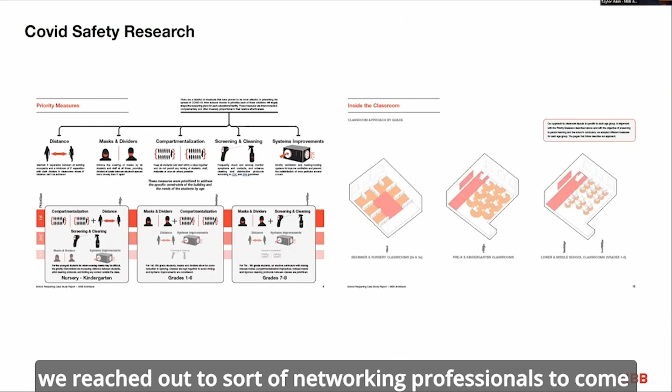We reached out to networking professionals to come up with good ideas for how to do this. I keep thinking that all of this expertise is now irrelevant and doesn't matter anymore, and that keeps not being the case. I know this has been going on for a long time, and everybody has found ways to adapt. I think what I'd like to talk about today is that nobody wants to repeat the last 2 years, but we should prepare for the reality that this is going to be an ongoing issue, and we need to find more durable, sustainable ways to adapt.

Everybody has reacted to this in different ways. That's dependent on what we've been told to do. It's dependent on the makeup of the communities and, frankly, their risk tolerance. And it has to do with the physical characteristics of the buildings themselves.

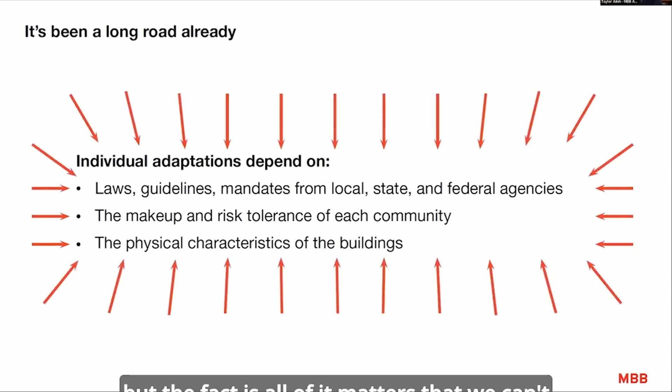You would think that the buildings is where we would focus our energy and attention, but the fact is all of it matters, that we can't look at any of these measures in isolation, like a table held up by 3 legs. This table has 15 legs, but they're not all equal. You take away 1 or 2 of the big ones, the thing's going down.

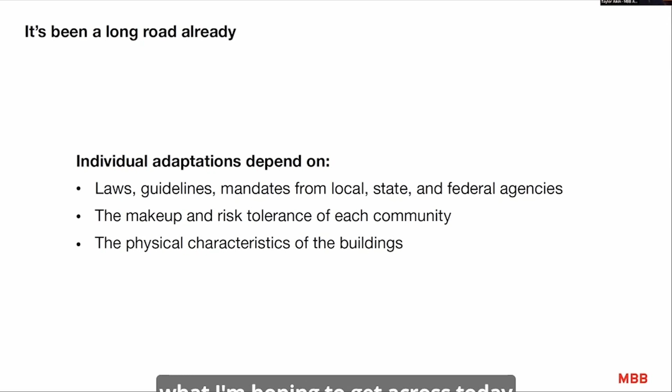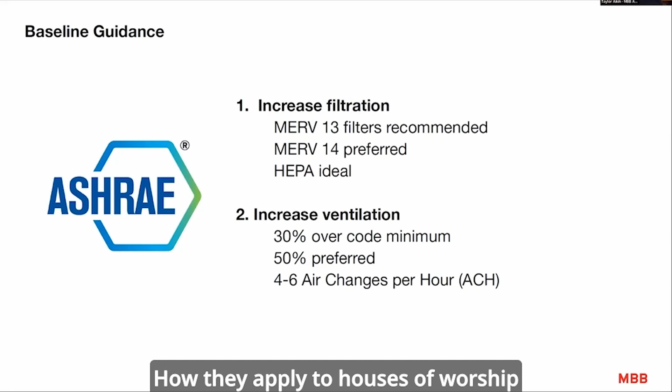So I think the goal here, what I'm hoping to get across today, is to deliver a more intuitive understanding of what the guidelines are, how they apply to houses of worship, because frankly, they're weird. A lot of the guidelines are simply not applicable. We've had to find some clever workarounds in the analyses that we've done. So that's the goal in 15 minutes. I think I can do it.

So we'll start with the easy stuff. The entity that delivers recommendations for what you should do with your building systems is ASHRAE, the American Society of Heating, Refrigerating, and Air Conditioning Engineers. It boils down to 2 things: increasing filtration and increasing ventilation, so that you filter the air as it goes and you get more outside air into it. We're going to come back to each of these in a bit more specificity.

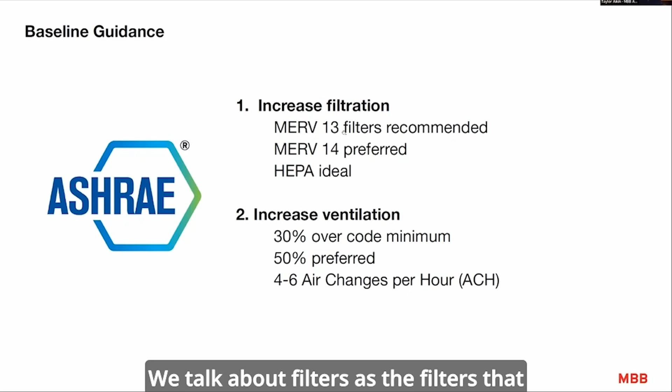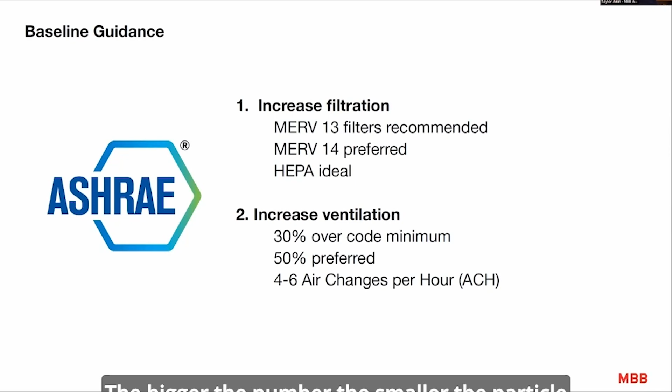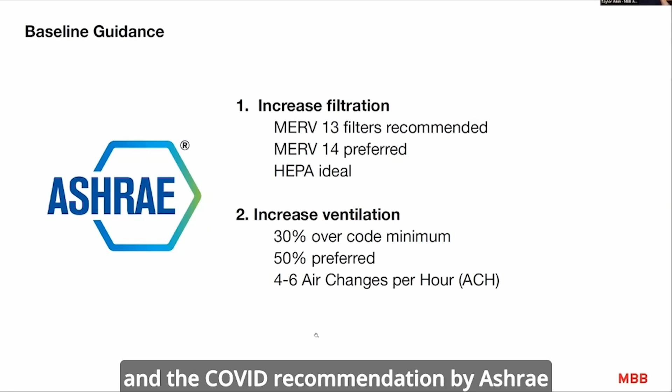When we talk about ventilation, one of the metrics they use is called air changes per hour, ACH. The COVID recommendation by ASHRAE is 4 to 6 air changes per hour, meaning any bit of air in your room is cycled through the system every 10 to 15 minutes. So those guidelines make great sense if you're in a space scaled for classrooms, conference rooms, whatever, if you've got contemporary mechanical systems that comply with current code for outdoor air supply. But what if you don't?

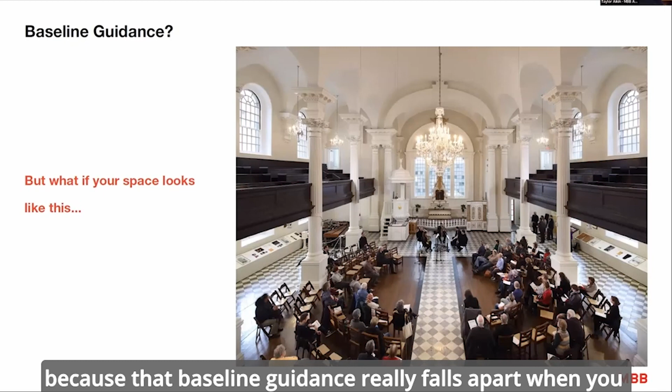What if your space is a very different kind of space? That's what we're going to look at, because that baseline guidance really falls apart when you start looking at historic buildings, religious buildings, and large buildings that either have mechanical systems that are old, or, as Jason mentioned, non-existent, or weird in some way, which is often the case.

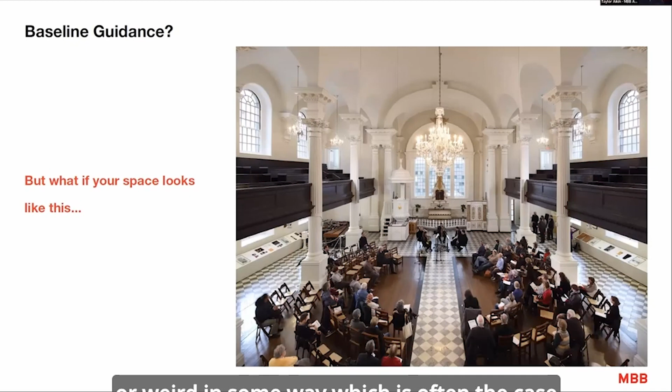So the recommendations then, instead of just looking at the filter you should put in your air handler that may or may not exist, we looked at it for 3 categories: people and what people are doing, the systems themselves, and then workarounds for when the guidelines don't apply.

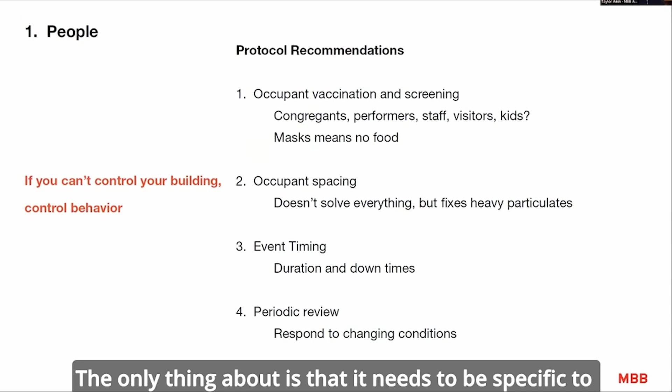So the people part is probably the most familiar to everybody. I don't know that I've got much new to say on this, except that when we're talking about vaccinations and screening, testing requirements, agreements to what you will claim to have done or not done when you come into the building, the only thing I'd add is that it needs to be specific to people who are doing different things. For example, if you have a congregant sitting in a chair with a mask on, there's going to be one set of requirements.

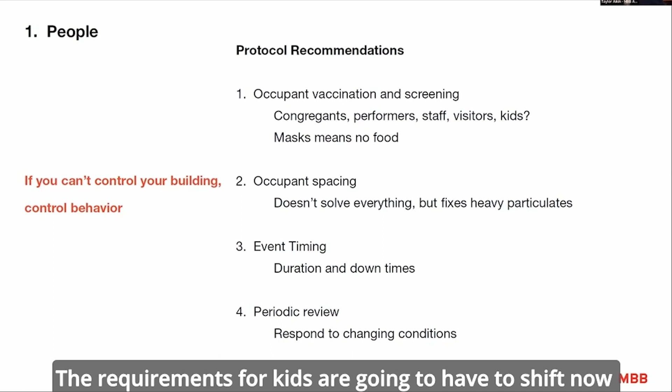If you have a choir member singing at the top of their voice without a mask facing those congregants, there are going to have to be stricter requirements, specifically for more regular testing. The requirements for kids are going to have to shift now that they're eligible for the vaccine, but not all of them have had it.

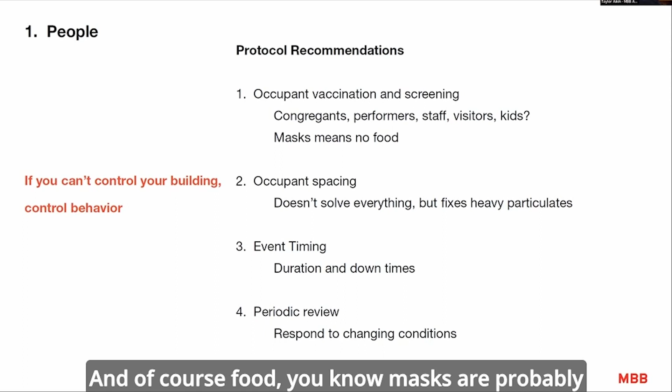And of course, food. Masks are probably the biggest table leg holding this thing up. So if you introduce food, the masks go away and it's problematic. Again, all this depends on the risk tolerance of your community.

On occupant spacing, we all know the 3-foot rule, the 6-foot rule. This is really just about sort of the... what's that? Sorry, Rick. Okay, if you have questions, you can interrupt me.

That's fine. I'm not going to watch the chat. So, hopefully we'll have time for questions at the end.

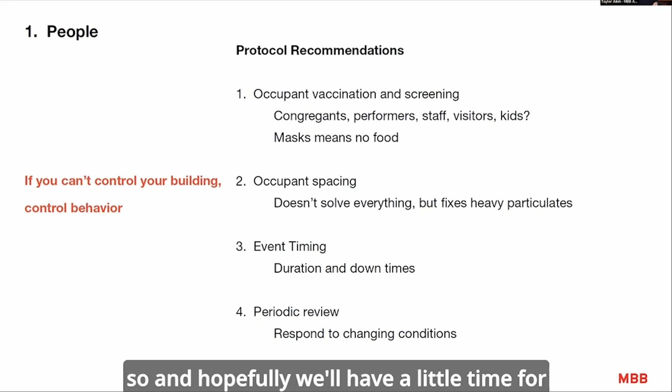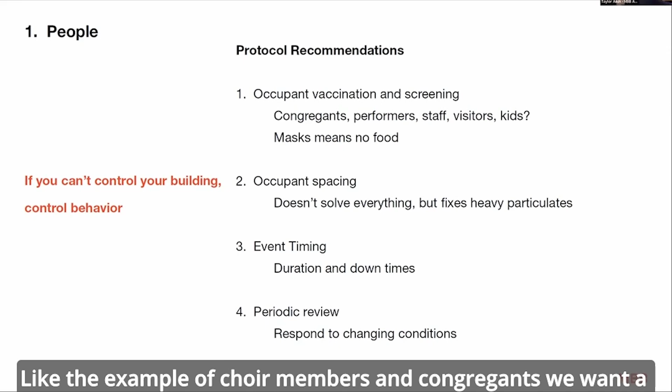So 6 feet is basically the distance it takes for a heavy particulate to drop to the floor. Like the example of choir members and congregants, we want a much bigger distance, 12 to 20 feet is recommended. And then event timing, we'll talk about in a little bit more detail. And then of course, reviewing these protocols as situations change.

So on the system recommendations, if you've got a forced air system with grills and air coming out of them, even if it's an old one, you may be able to tweak it. If you've got a modern system with controls, you can just dial up or dial down the amount of outdoor air that's supplied. That's easy, but you may also be able to move physical dampers to increase the outdoor air supply. We're going to talk about when that's a good idea to do.

It's good to keep in mind that you are going to run up against the capacity of your systems. Systems are designed for a certain level of efficiency, so that recirculated air requires less energy to heat or cool than outdoor air that's either extremely hot or extremely cold. So maintaining reasonable temperatures inside and reasonable relative humidity levels is a consideration.

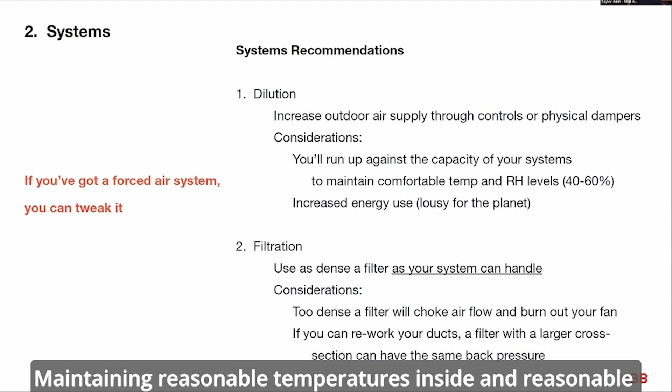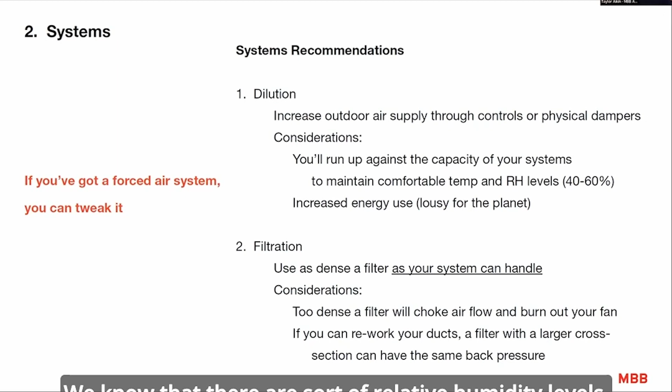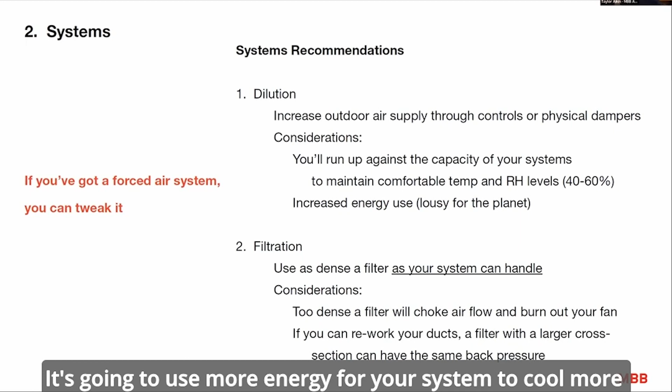I think you could stretch that envelope to a degree because the importance of dilution of indoor air with outside air is so important. We know that there are relative humidity levels at which virus particles are more or less comfortable, and so you want to target 50% relative humidity. Frankly, it's a drop in the bucket in terms of effectiveness compared to introducing outdoor air, and it's going to use more energy for your system to cool more hot outdoor air or heat more cold outdoor air. I'll come back to that again later.

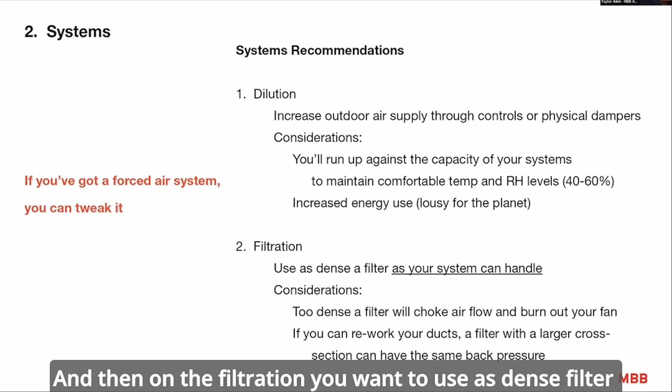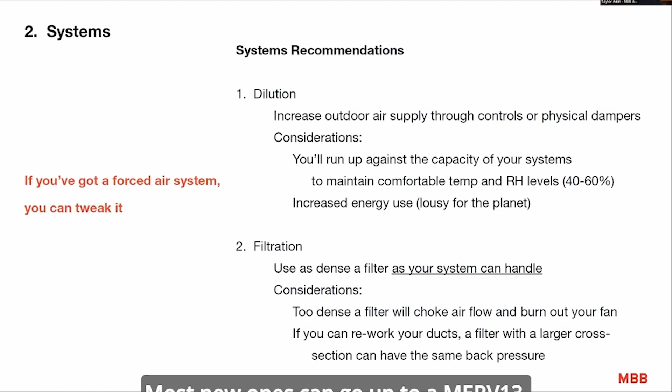On filtration, you want to use as dense a filter as the system can handle. It would be great if we could all just go get HEPA filters and pop them into our air handlers, but they're not designed for that density of filter, so it's going to choke your airflow. You're going to have less air moving through the system, and it's going to burn out your fan. There are manufacturer guidelines for any given piece of equipment that tell you how dense a filter you can put on. Most new ones can go up to a MERV 13. Old ones are designed for MERV 8, and anything else will kill it.

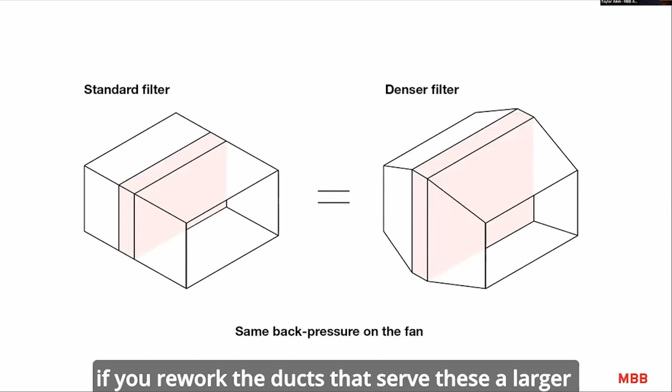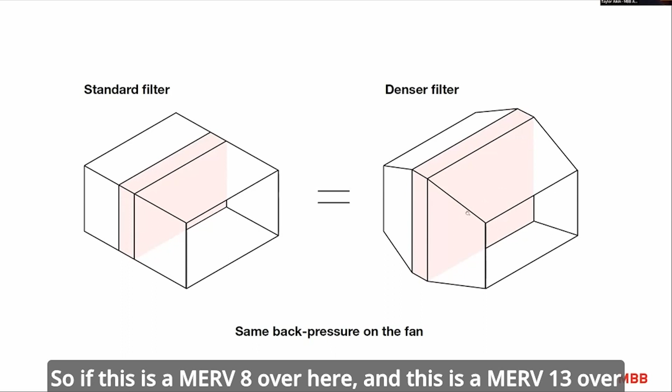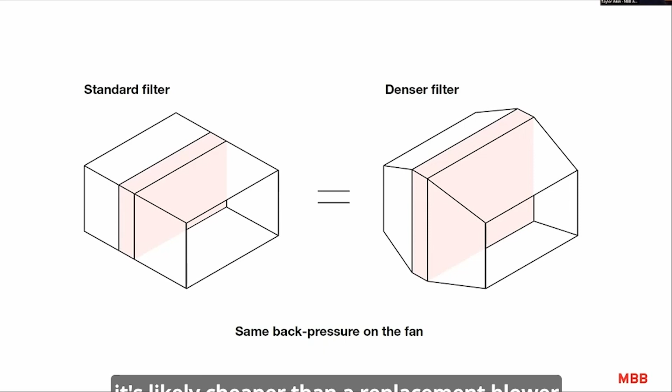One workaround we found is that if you rework the ducts, a larger cross-sectional area of a denser filter will have the same back pressure as a smaller cross-section. So if this is a MERV 8 over here and this is a MERV 13 over here, they actually have an equivalent back pressure. Now, a lot of what I'm talking about in terms of system adaptations don't cost anything. While this does cost something, it's likely cheaper than a replacement blower on an air handler, or the $250,000 it'll take to replace the entire system.

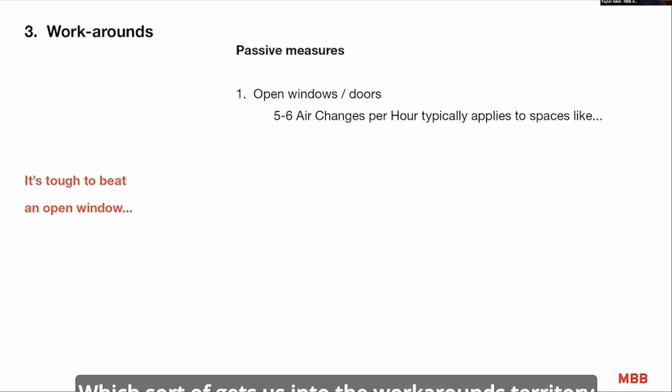Which sort of gets us into the workarounds territory. In all the analysis we did, starting with looking at schools and the different buildings and conditions we've looked at, it's tough to beat an open window.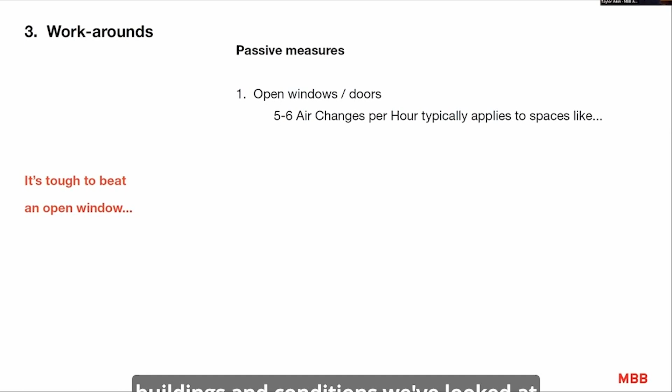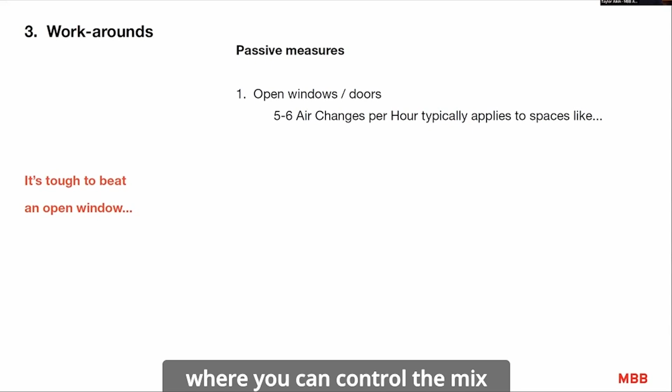Opening windows or doors, if you don't have a conventional mechanical system where you can control the mix of outdoor air, is hugely important.

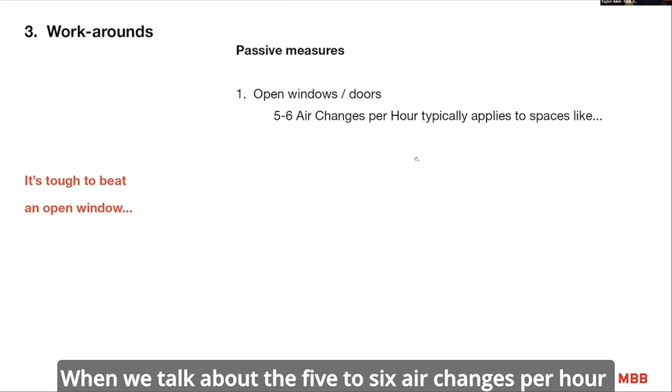When we talk about the 5 to 6 air changes per hour guidelines from ASHRAE, that makes perfect sense in a room like this conference room. You've got a contained volume of air, and you want that air recirculated with fresh air supplied to it. But in very different space types, 5 to 6 air changes per hour is kind of absurd because there's so much volume of air relative to the number of occupants. So you can actually calculate a fractional ACH equivalent. You don't need 5 to 6 air changes per hour in a space like this. You need something like 0.8 because there's just so much air in the space.

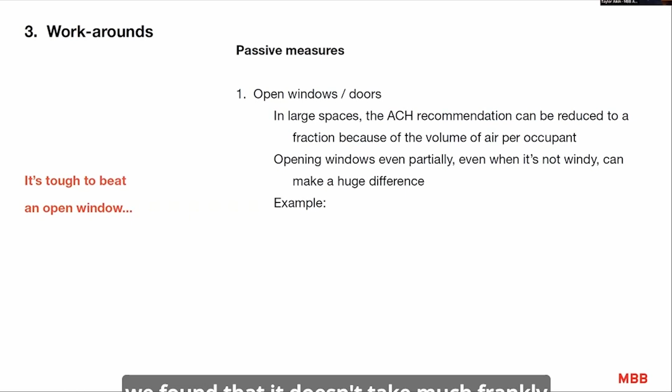When we did an analysis on a specific space, we found that it doesn't take much, frankly. We looked at how much outdoor air, given certain assumptions, we'd need to supply to get that 5 to 6 air changes per hour equivalent. We found that just one window opened, assuming a 1 mile per hour wind speed outside, would get us there—and most of the time it's more windy than that. There are 20 windows in the space, so you could open all of them 1/20th as much and it'll get you there. So be aware that because we're dealing with large volumes of space, it may not take as much as you think to get a huge improvement in ventilation.

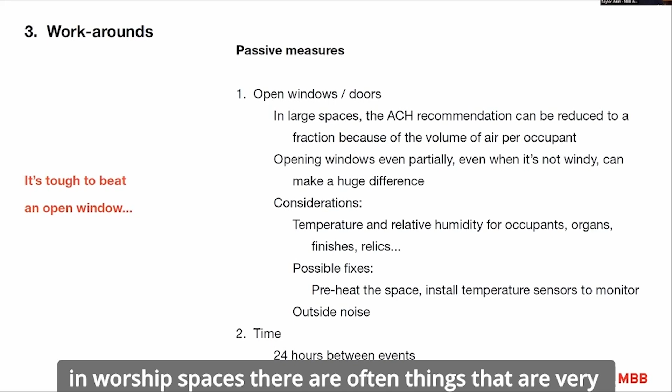There are considerations related to that. We talked about temperature and relative humidity before. In worship spaces, there are often things very sensitive to changes in extreme temperature and relative humidity. For example, organs are really finicky. Their finishes—very thin wood veneers or metal finishes—can be sensitive to that. And if you have, for example, Torah scrolls in your space, that can be very sensitive to extreme temperature and humidity.

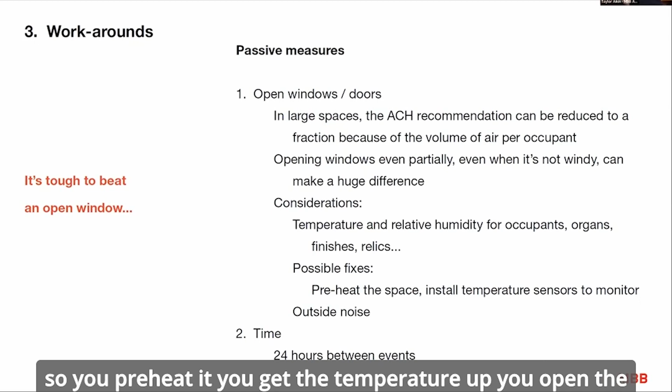So potential workarounds for that: before an event, you sort of prime the space. You preheat it, get the temperature up, open the windows, it gradually cools down, and at some point you hit a threshold where if it gets any colder things are going to start to be damaged, and you shut it down. That was sort of the solution we were looking at for that condition.

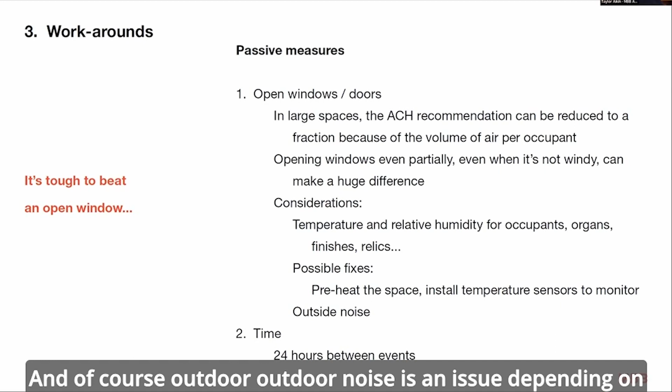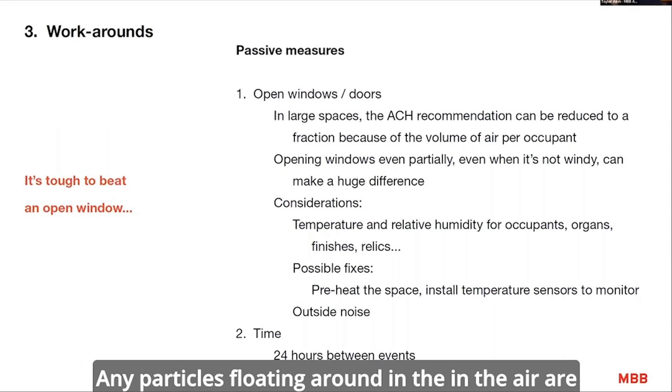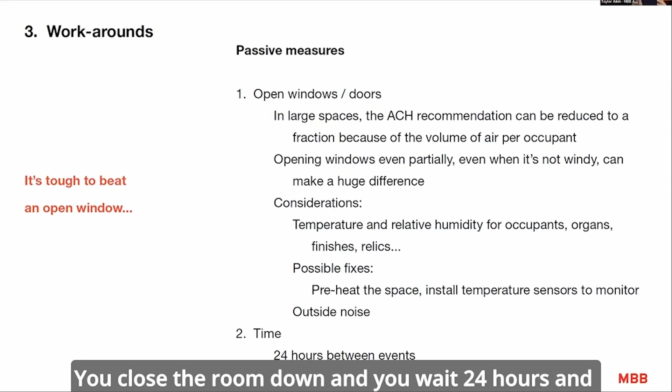Of course, outdoor noise is an issue depending on where you are and what's around you—that's just a consideration. Now, the goal of the 5 to 6 air changes per hour is to make sure any particles floating in the air are cycled through the system and filtered out or diluted with outdoor air. If you can't do that, or it's impractical, time solves it too. You close the room down and wait 24 hours, and effectively the same thing happens. If you can schedule 24 hours between events, it means you've eliminated the risk of exposure between one group being in the space at one time and another at another time.

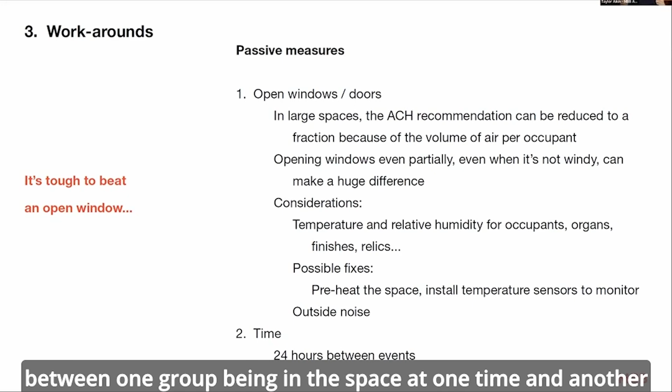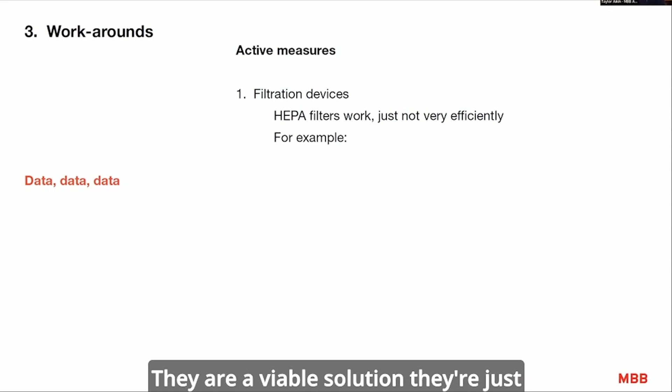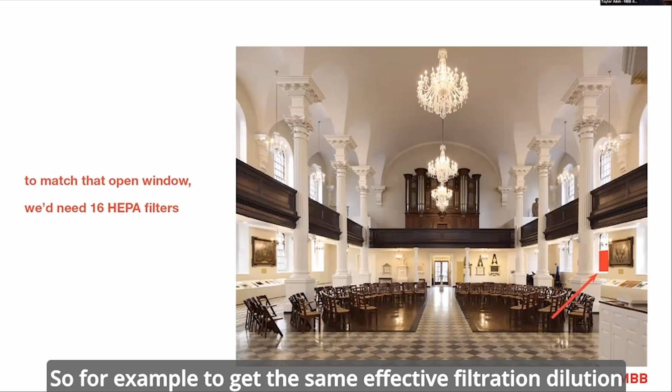So those are passive workarounds. When we talk about active workarounds, standalone filtration devices like standalone HEPA filters—there's one sitting right here—they work. They are a viable solution, they're just not terribly efficient. For example, to get the same effective filtration dilution impact we got from this one open window, we would need 16 recirculating HEPA filters in this space, which is going to produce noise. We're going to have power sources we'll have to get to each of those. So it's viable, but relatively inefficient.

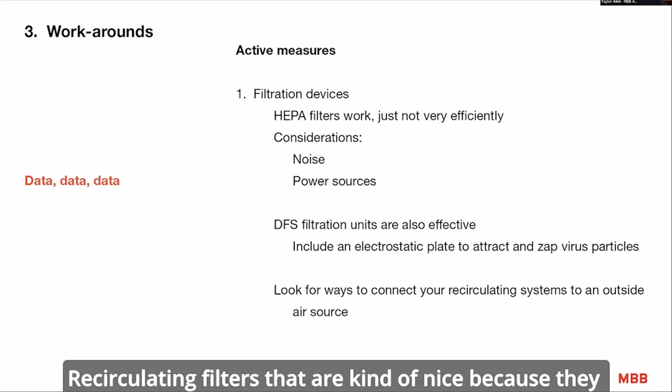Another version of that are called DFS, disinfecting filtration systems—standalone recirculating filters that are kind of nice because they have an electrostatic plate in them that zaps particles. So at least you're capturing a bunch of dead particles instead of a bunch of live virus particles.

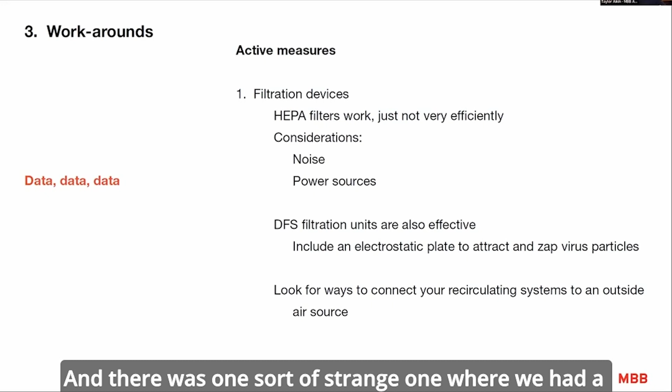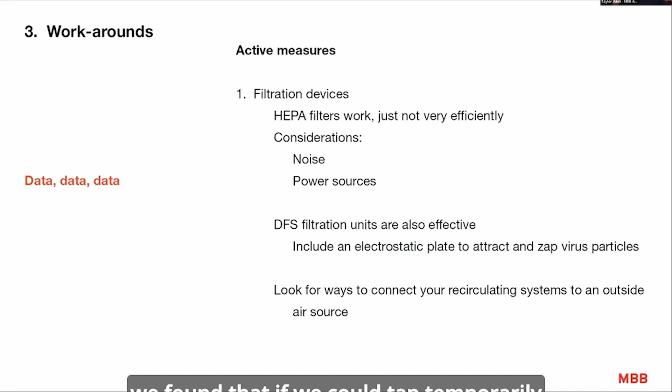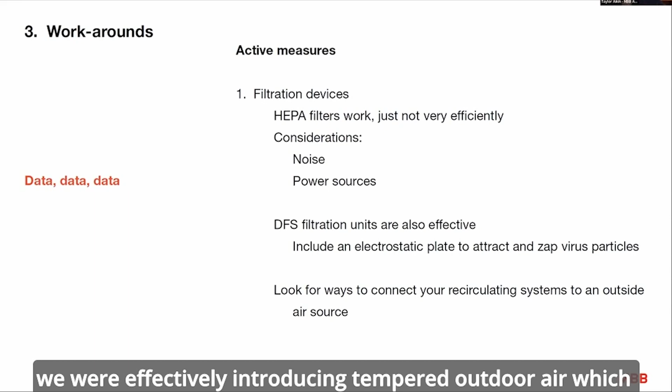There was one strange case where we had a building with recirculating units close to the perimeter. We found that if we could temporarily tap a duct to the recirculating intake of those units and just run it to a window, we were effectively introducing tempered outdoor air, which helped with both noise and the temperature drop in the space over time.

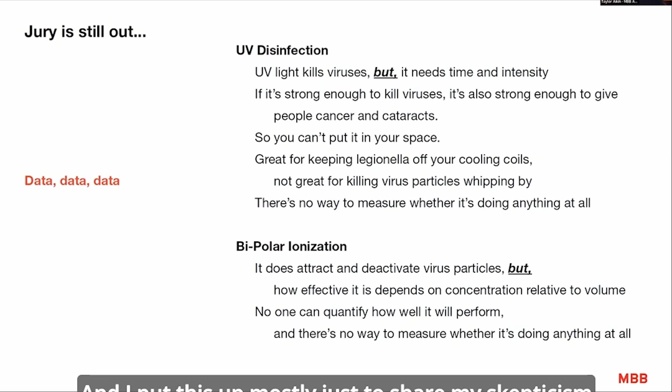The reason I put data over here is that there are other systems and pieces of equipment out there, some exotic, some simple. I put this up mostly to share my skepticism. Take just a couple of examples: UV disinfection. It is true that UV light kills viruses, but it needs time and intensity. Basically, if the UV light is strong enough to kill a virus, it's also strong enough to give people cancer and cataracts. So you can't just park it in your space.

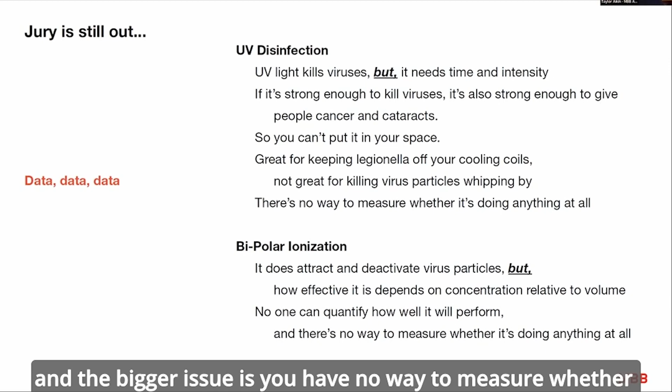If you put it in your air handling units, it is great for keeping Legionella bacteria off of your cooling coils, for example. But for the air that's whipping past them at a few hundred feet per minute, it is doing virtually nothing. And the bigger issue is you have no way to measure whether it's doing anything at all. You can spend $20,000 and put one of these systems into your HVAC equipment and have no idea whether it's working.

And the same kind of goes for bipolar ionization. It does work. You introduce charged particles into the air and it does attract virus particles and it does deactivate them. But nobody can quantify how well it works. It's all about how many charged particles you have and the density within the volume of space. So without any measurable information, we've not recommended this.

I've talked institutions out of both on multiple occasions, because it's kind of tough to beat an open window.

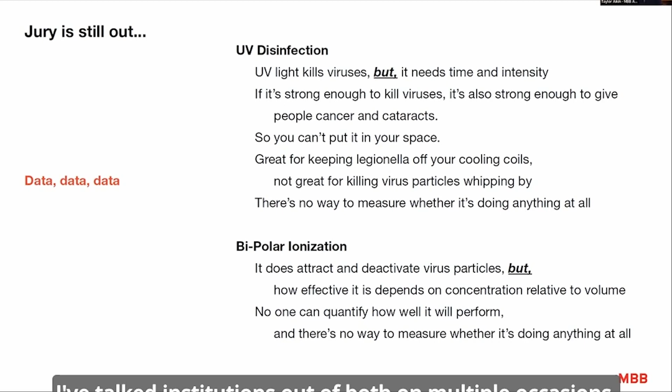Yeah, so I hope there was something new in here. I hope this wasn't a total repeat of everything you already knew and have been dealing with the last couple of weeks. But those are kind of the workarounds.

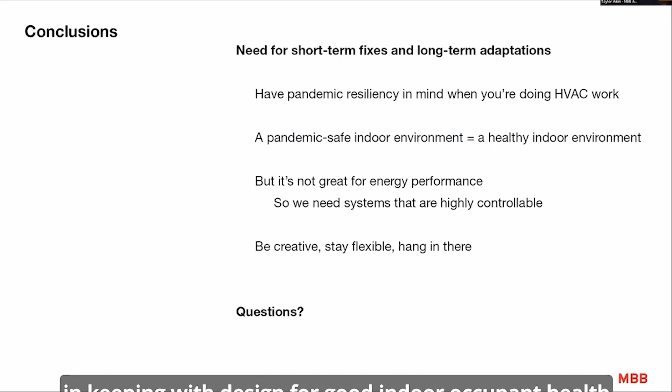When we think about the long-term impacts of this and how we adapt over the longer term, I think when you do work to your HVAC system, having pandemic resiliency in mind is something we should all do from now on. That's generally in keeping with design for good indoor occupant health. A pandemic-safe environment is a healthy environment by and large, but the kinds of things I've talked about are generally lousy for energy performance, like keeping your windows open and introducing more outdoor air.

So because energy performance is such a critical thing for buildings, as Meta is about to explain to us, what we really need are systems that are highly controllable, where you can dial up the outdoor air and dial down the outdoor air, so that our systems are as adaptable as the people in them.

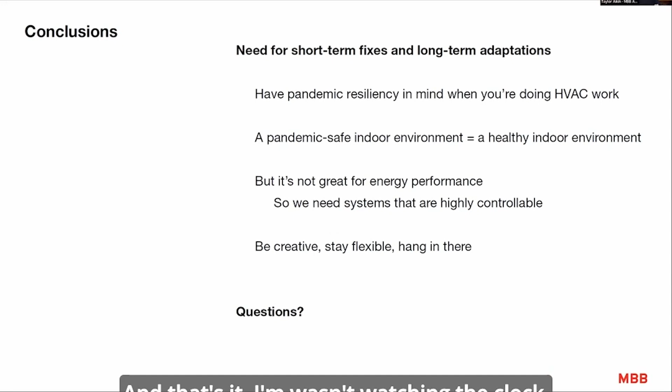And that's it. I wasn't watching the clock, so Kate, tell me if we've got a couple minutes. I don't know if there are any questions, but that's all I have.

Yeah, there's time for a couple questions if there are any. If there are any. Otherwise, I'll figure you've all got it figured out. All right, move on.

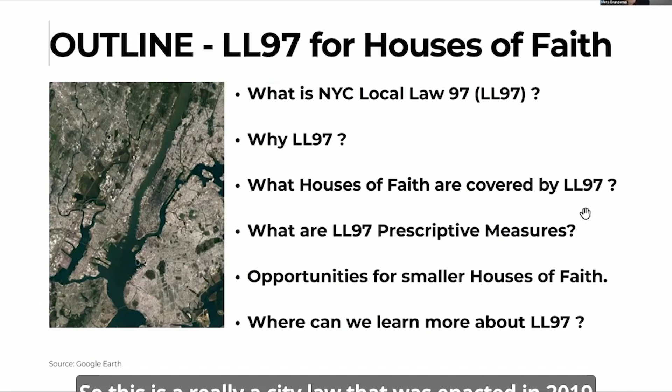Finally, in my last slide, I'll list a few resources where you can learn more about this topic. So this is really a city law that was enacted in 2019. It is the centerpiece of the New York City Landmark Climate Mobilization Act, also known as the New York City Green New Deal. And what it will do is place strict limits on greenhouse gas emissions from all buildings larger than 25,000 square feet.

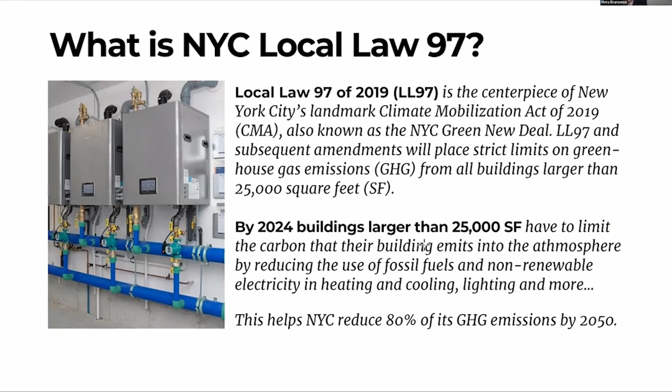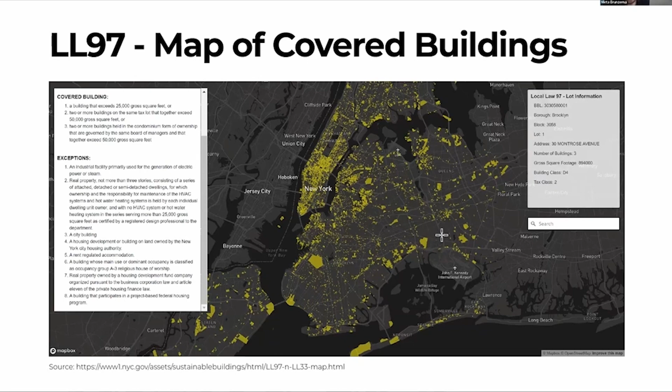Local Law 97 is only one of several laws enacted as part of the larger package in 2019. There's also Local Law 92 and 94 for green roofs and solar PV, Local Law 95 about building labeling—you may have seen the letter grades on buildings required in November, A, B, C, D, and F, showing how successful the building is in meeting energy efficiency—and a new law, Local Law 98, about offering wind energy as a potential energy source.

So what are the Local Law 97 goals? Obviously, it's to reduce operational greenhouse gas emissions in mid-size and large-size existing buildings, for example with heating, cooling, lighting, hot water, etc., and to meet New York City's global and local climate plan commitments. I will detail what those are in the next slide.

A side effect from this, which I'm sure is not unintentional, is to expand the energy retrofit market by approximately $20 billion from now until 2030. This will create approximately 141,000 design, engineering, and construction jobs. And of course, the net result will be that the city will have more valuable buildings and bring energy savings to building owners and tenants.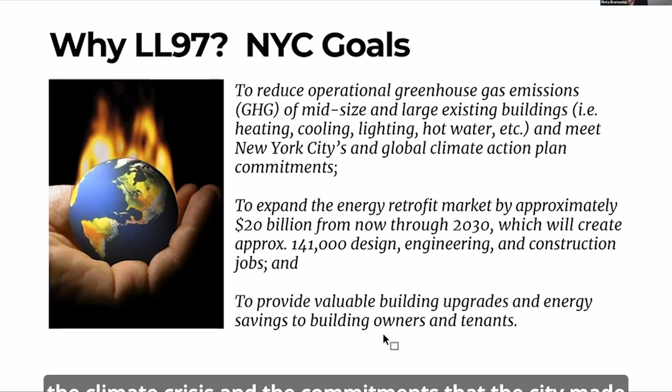But at the core of it all is really the climate crisis and the commitments that the city made. Already in 2014, Bill de Blasio committed to reducing the city's greenhouse gas emissions by 80%, and that is what 80 by 50 means—joining many other nations around the world in similar commitments.

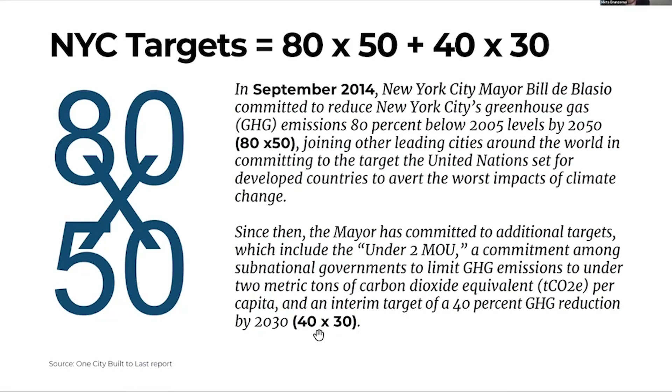After that, the mayor also committed to additional targets, called 40 by 30, which is an interim target of a 40% greenhouse gas reduction by 2030. So we have a lot of goals here that are part of the reasoning why this law is in fact being enacted.

The city is not alone. The city is working with a state that has its own climate action laws, and you can see there's a real deliberate timeline going from 2020 to 2050. The ultimate goal is citywide carbon neutrality.

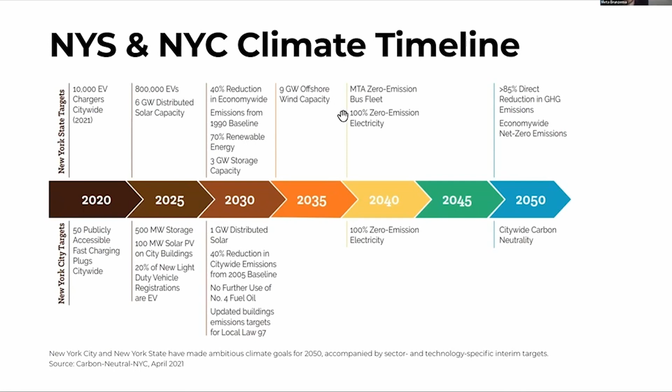So let's talk about Local Law 97 and houses of faith. You may have heard about Local Law 97 imposing carbon caps, like limits for carbon emission, in larger commercial and residential buildings. It turns out houses of faith are under Local Law 97, but they have an alternate path of compliance, to make it easier on houses of faith to meet the climate goals.

Houses of faith are not alone in having this particular special path. Certain affordable housing developments and NYCHA developments are also exempted and have special regulations. So what do houses of faith have to do?

There are prescriptive measures, which I will show you in a few slides, that are required of houses of faith to implement by 2024. These include the installation of insulation, sensors or controls for HVAC or heating and cooling equipment, as well as other energy efficiency measures.

Houses of faith smaller than 25,000 square feet do not have to comply with Local Law 97. But I know many houses of faith on this call are actually smaller congregations. The city is still very interested in having smaller buildings work toward climate neutrality, and I will discuss that in a few minutes. The city actually offers technical and financial help to buildings of all sizes.

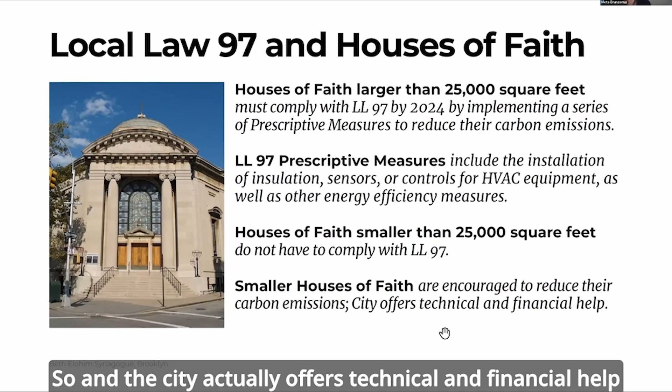So what is a covered building under Local Law 97? First, it's a building that exceeds 25,000 gross square feet, or two or more buildings on the same tax lot that together exceed 50,000 gross square feet, or two or more buildings held in condominium form of ownership, governed by the same board of managers, that together exceed 50,000 gross square feet.

One way of knowing if your building is covered is that if your building is currently subject to the New York City benchmarking law, which is Local Law 84, where you have to report energy and water use to the city, then you know that your building will need to comply with Local Law 97.

Houses of faith, as far as I know currently, are defined in the law as buildings whose main use or dominant occupancy is classified as occupancy group A-3, religious house of worship. Those houses of faith over 25,000 square feet must meet the prescriptive measures by 2024.

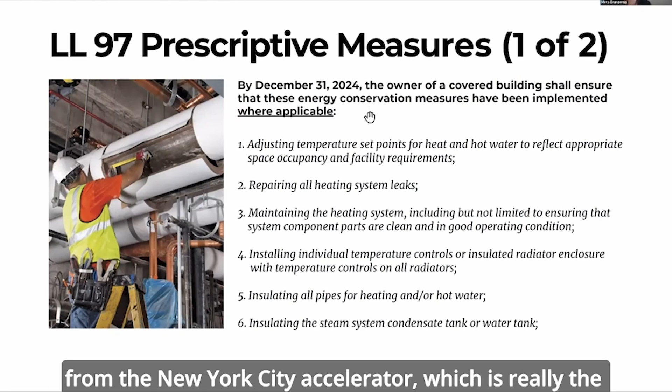So let's look at what those prescriptive measures are and what needs to be done in what order. I had a conversation with a technical advisor from the New York City Accelerator, which is really the technical assistance unit for this Local Law 97, about how to really address these potential improvements to the building.

So we have adjusting temperature set points for heat and hot water, repairing heating system leaks, maintaining the heating system, installing temperature controls, insulating pipes, insulating the steam system or water tank.

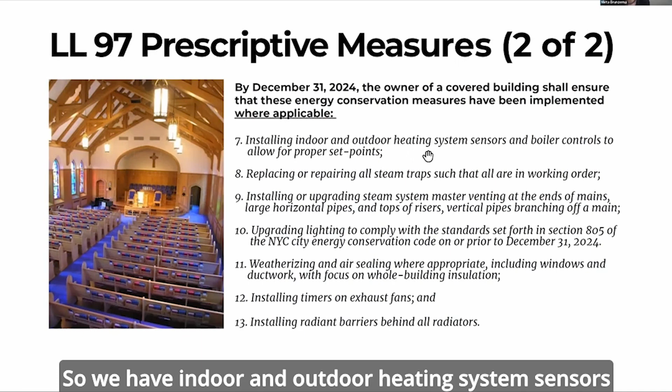You're probably wondering, well, what if my building doesn't have steam? I'm going to go to the next slide to show you the rest of them. It turns out these measures have to be applied where it makes sense. So if your building doesn't have steam, you need to choose from this menu of possible measures what actually does make sense.

We have indoor and outdoor heating system sensors and boiler controls, repair of steam traps, upgrading various HVAC components, upgrading lighting which is really very, very effective, weatherizing the building, installing timers on exhaust fans, and so forth.

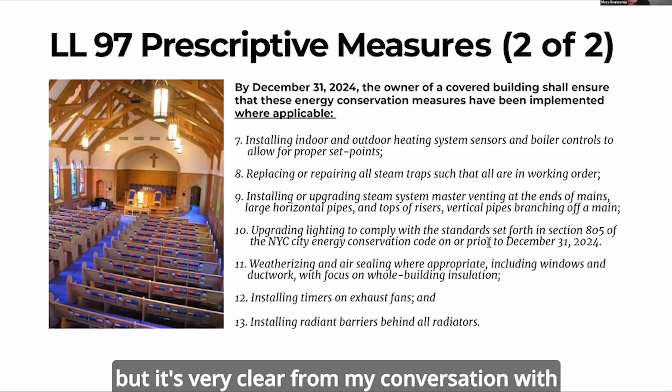So this is the full list. It comes directly from the law. You can have a look at it later in greater detail. But it's very clear from my conversation with the technical advisor that not all of them are applicable to all houses of faith over 25,000 square feet. This is a menu where the architects and engineers that work with the house of faith really have to sort of come up with something that makes sense, with the goal of reducing the carbon emission and energy use of the building.

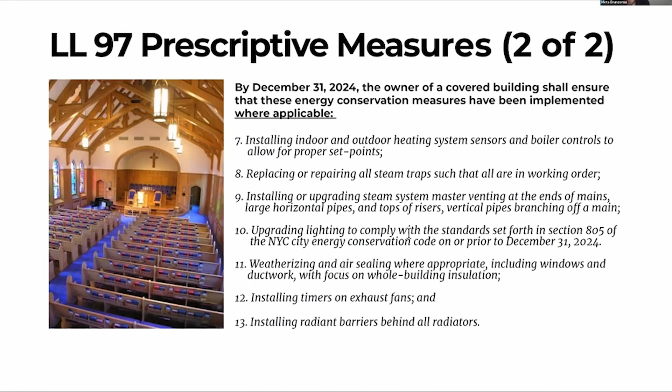So how do we comply with this? Houses of faith larger than 25,000 square feet have to send a report to the Department of Buildings on May 1st, 2025, documenting their prescriptive measures, the list I just showed earlier, during the year 2024. And then they have to send another report every year after that.

So one of the pieces of advice that I got was that really any house of faith of that size should really start planning sooner rather than later, so that if something goes wrong in the year 2024, that doesn't compromise the whole effort.

So it's really all about the best effort and a smart solution for whatever property you have. In many ways, the Department of Buildings and the city will look at each property on a case-by-case basis. So what if a faith-based institution decides not to comply, or just takes it very easy and does one thing off of the list? It was very, very clear to me that this will not be acceptable to the city, and the city will issue a Department of Finance and a Department of Buildings non-compliance letter, and possible fines to the property owner.

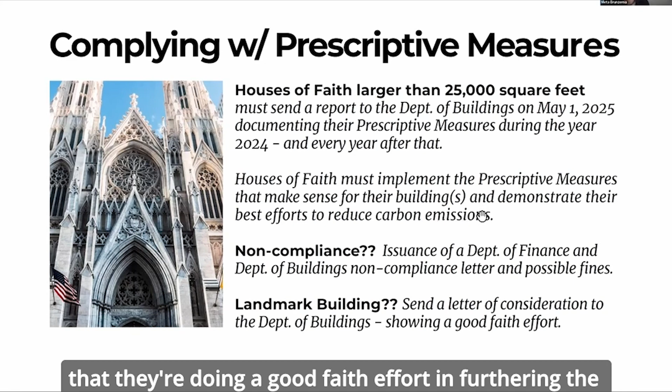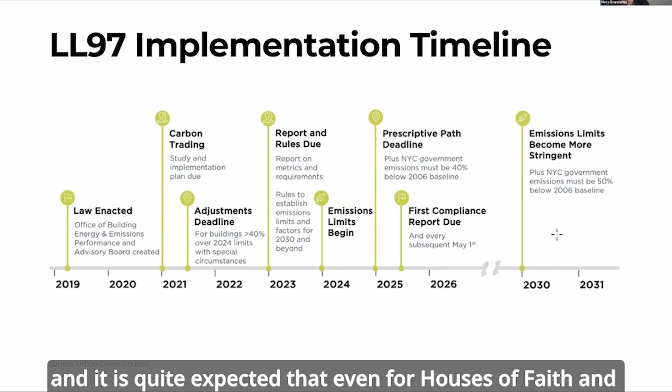You can sort of see the year that you have to focus on is 2024. You can see the end of 2024 is the prescriptive path deadline. That is when all of the improvements to the facility have to be done. And the report happens on May 1st of 2025.

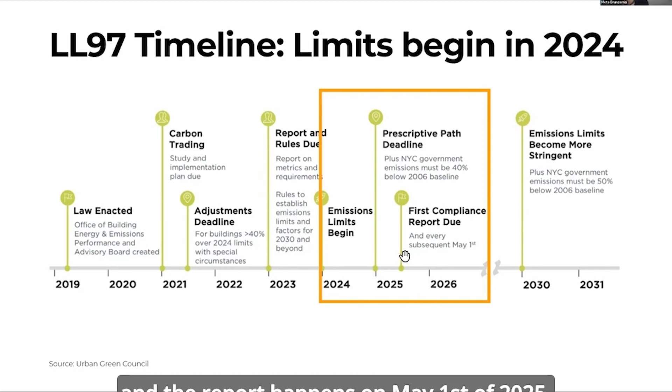So what about smaller houses of faith? The city is really encouraging buildings of every size to retrofit and climate-proof their buildings, just because it makes a better city, and because people can enjoy a more comfortable building and the savings of a more energy efficient building. So the city is offering a variety of low interest loans through financial partners. For larger projects, the city has created a financial instrument called PACE, but smaller loan packages are also available, and all of those smaller loans are currently being figured out by the city.

And this is something that you would have to negotiate on a one-by-one basis with the New York City Accelerator, which is the office that actually gives technical assistance. I will give that contact information at the end. There are other agencies that are also offering energy incentives for retrofits and renewable energy installations, including NYSERDA, which is the state agency that deals with energy, renewable energy, and retrofits.

An option that was mentioned in my conversations with the city were energy services agreements. In the Fordham presentation we heard earlier, one of the energy service providers is BlocPower. They help install either heat pumps or solar panels for a very low cost and on a long-term basis, generally resulting in lower energy bills and very little upfront money for the church.

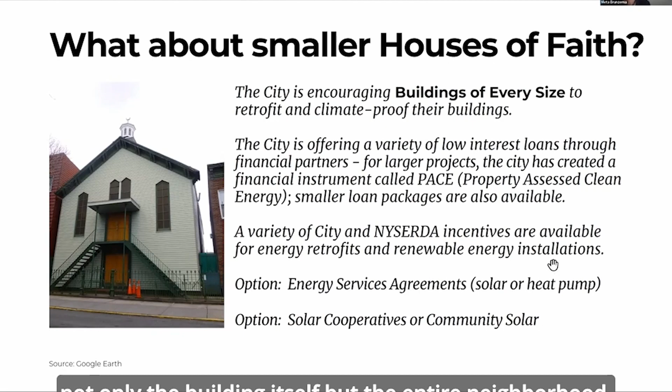Thank you, Meta. Beautiful, very interesting. Questions, comments?

The one thing I'd love to say is that developers and large property owners are paying very, very close attention to Local Law 97. They're thinking a lot about it, and nobody else is. So this is a PSA: think about it, take it seriously.

Just to terrify you all, we did a back-of-the-envelope analysis for a large building owned by a higher education institution in New York City. They are a grade B, they've been doing their energy reporting. In 2024, their Local Law 97 penalties were going to be a few thousand dollars, and by 2030 it was going to cost them $100,000 a year for their level of compliance with their greenhouse gas emissions. So in 2024 it's not so bad, but the penalties are hockey-stick shaped, and they get very onerous.